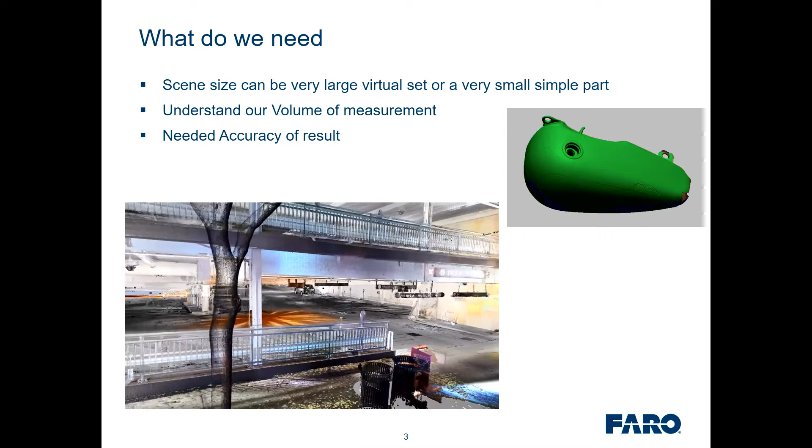So what do we need? How big of a scene size are we going to capture? I've got a couple examples here. I've got something very large, a parking garage that has probably 200 scans. We ran 3 scanners for about a 4-hour period of time to generate that. So millions and millions of points, but it's a very large data set.

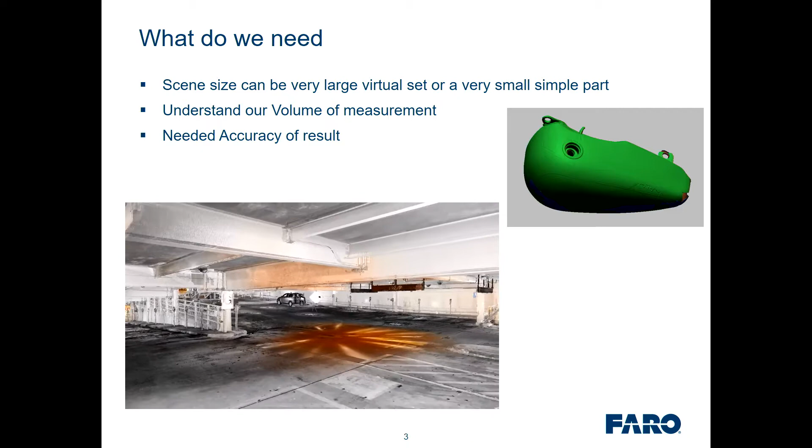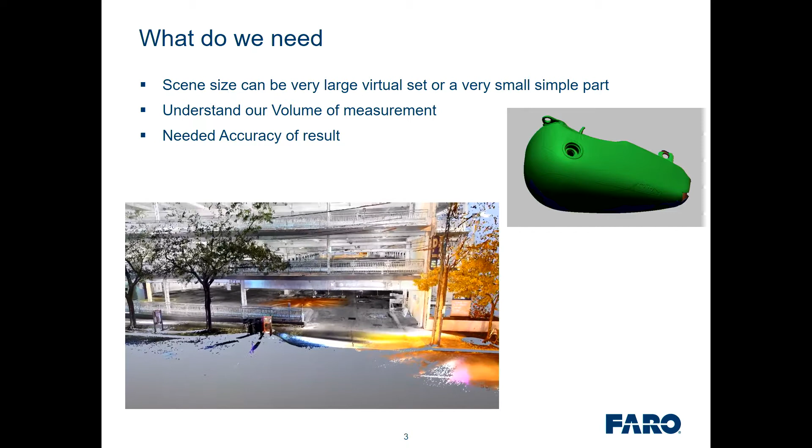And then something smaller, up in the upper right is a gas tank that's been scanned with a smaller device like what I have outside. So we have to understand what our volume of measurement needs are, and we have to understand what kind of accuracies we need from the result.

So method of capture: when I started getting into doing this stuff at Faro, it never occurred to me that there are basically 2 different types of ways to measure. There's contact or non-contact. You're either going to touch something to measure the part, or you're going to use some sort of sensor to measure the part.

Contact measurement is very accurate, but it takes a long time to touch all of these parts. Going back to our garage example, a surveyor would go out with a total station and a rod, and it would take them hours and hours to complete that task. But it'd be very accurate. It also means we have to have access to all the things we're trying to touch.

So think of something maybe like a cylinder head. There might be areas in there that you have to be able to get in and touch, and so it gets challenging at times. Non-contact can help solve some of those problems. It's faster, but not necessarily as accurate as touch probing. We're basically measuring surfaces instead of discrete points, and also we have to maintain a field of view or a line of sight, similar to what we're talking about with contact capture.

Kind of going along those lines, we have different ways to capture using non-contact. Photogrammetry, that's very popular these days. And think about what we're doing with photogrammetry. It's basically we're measuring light. As we open up our shutter, light's reflecting off a surface and coming to it.

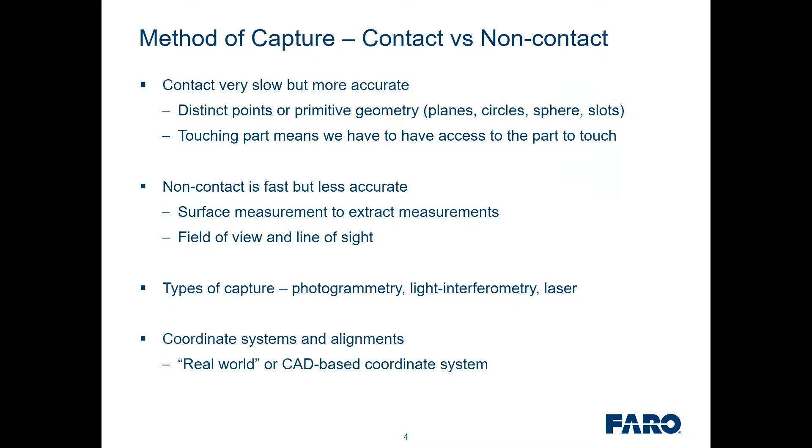So in the world of Faro, we have various products, and this is just a sampling of them, and I've got another product that we're going to talk about at the end. How do we measure our parts? We can go different volumes on the left side, from small volume to large volume, and then accuracies from left to right. So the tracker is a large volume, very accurate laser tracking device,

and we can get into something similar with a contact arm, a measuring arm that has a scanner on the bottom, and then our blue light interferometer, the Cobalt, is shown there. And then that garage I did was with our new Focus product. So that gives you kind of an idea of what types of products can be used to measure these parts.

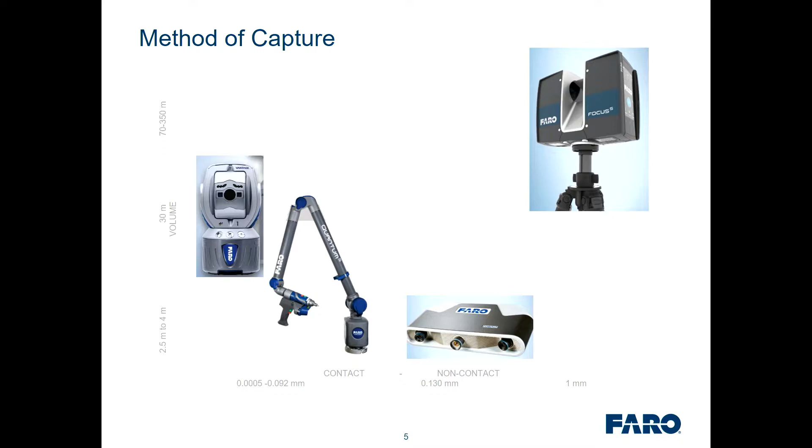So, we collect this data. What do we do with it? Well, we have point cloud data that we have to turn into mesh, because really point clouds are just collected data. In terms of geometry, they're only locations. They can have attributes, like in the focus scanner example, it's XYZs, and then there's an RGB value that's associated with it, or maybe a reflectance value.

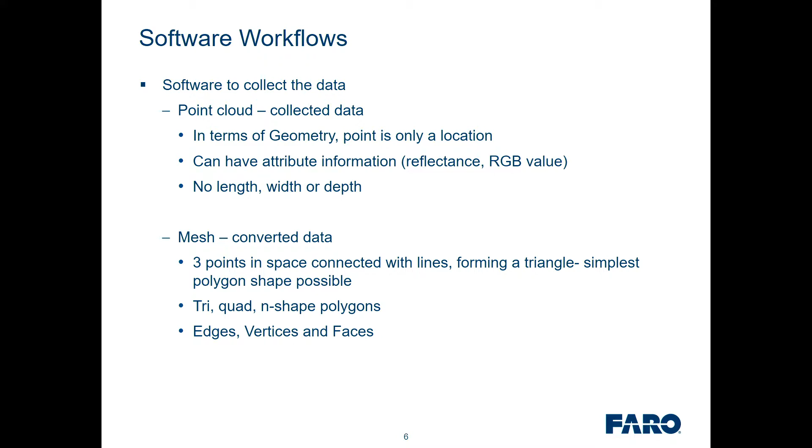There's really no geometry in terms of length or width. We can measure between points, but we can't really get any data off of those points. We can convert it to mesh, so we're just going to convert our point data, and a mesh is just 3 points in space connected with some type of a line, and there's edges, vertices, and faces that are associated with a mesh.

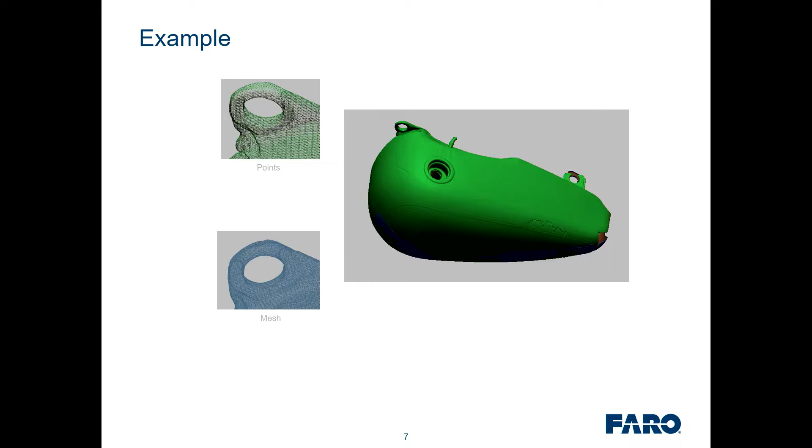So for example, using my gas tank, if you look at the top left, that's points, and then down at the bottom left is mesh. So we've got the points that actually came from the actual device, and then we've converted that data. So it looks very much representative of what we captured in the real world.

So kind of wrapping this part of it up, software workflow. We collect the data, either scanning or probing it, convert it to mesh. We can extract it to parametric type CAD using systems like 3D Systems DesignX. And then we can also visualize our scenes for asset creation using the example of our parking garage, if you're doing something like gaming or VFX.

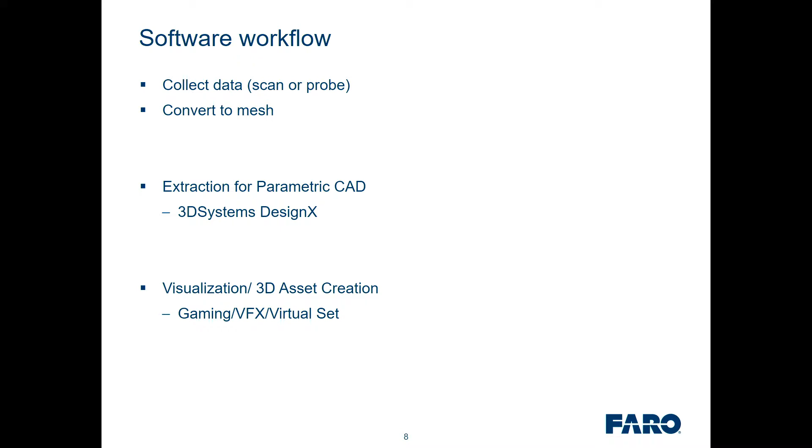So these are kind of our workflows we're going to go through, and I have an example of maybe how we do a product design. So maybe we have a Toyota FJ that we want to put a new bumper on. So we've got our device, remember the arm? We can actually probe and scan points. So this is an example of how we've created a point cloud of scanning.

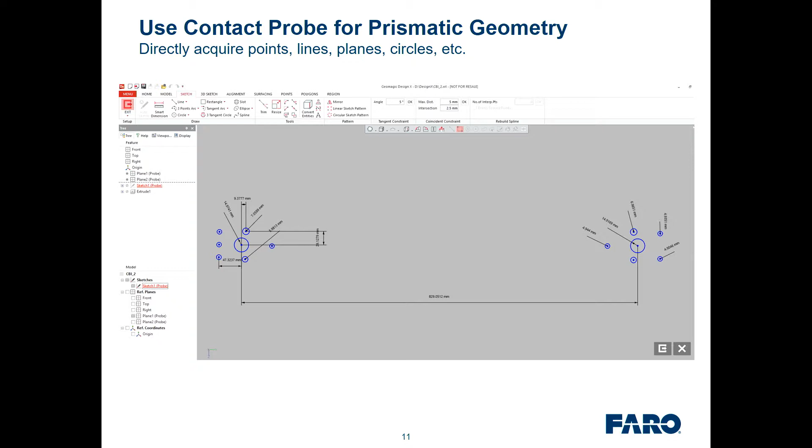And we've probed maybe attachment points, bolt hole locations, something we need very accurate locations on, so we can take that data as well. And then we can align it to a coordinate system. In this case, we're doing a CAD-based coordinate system with a simple 3-2-1 alignment. And then we can define sketch planes and extract data off of the mesh.

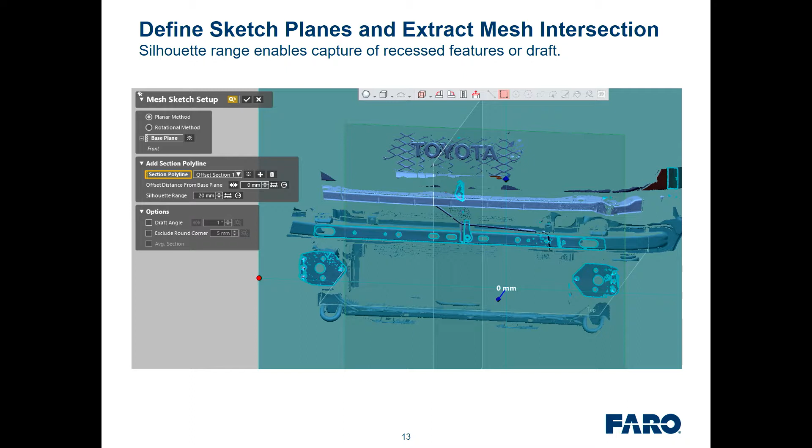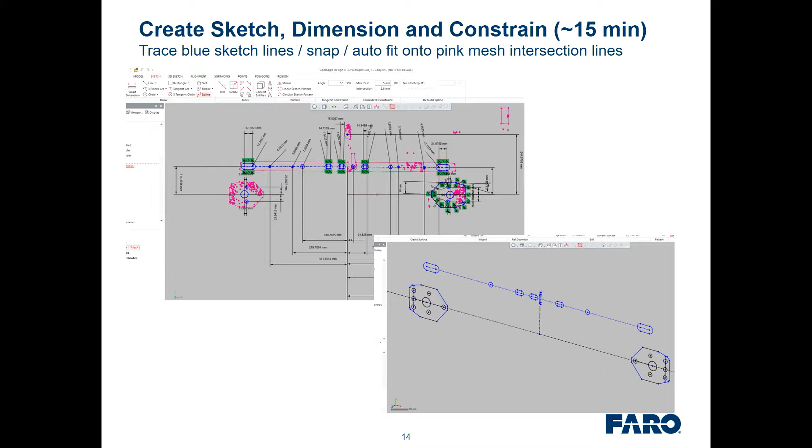So we're just going to create this geometry, and then do extrudes, do lofts, do any number of operations to get it into a CAD model. So basically we're just tracing over. We're just creating lines out of the mesh data, tracing over top of it, and then we can take those and actually create parts.

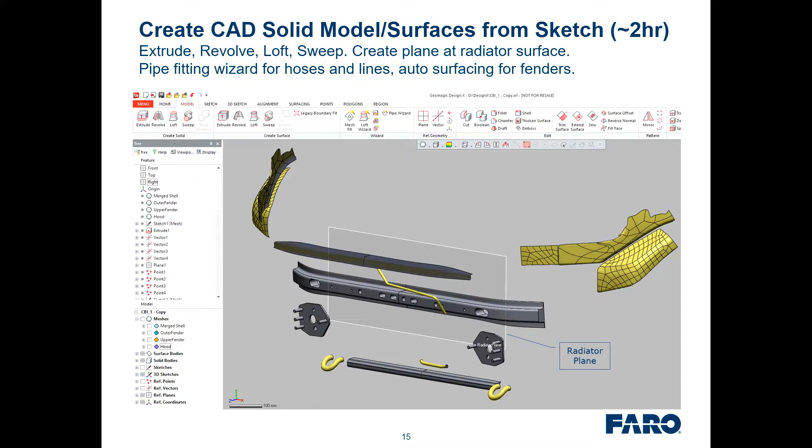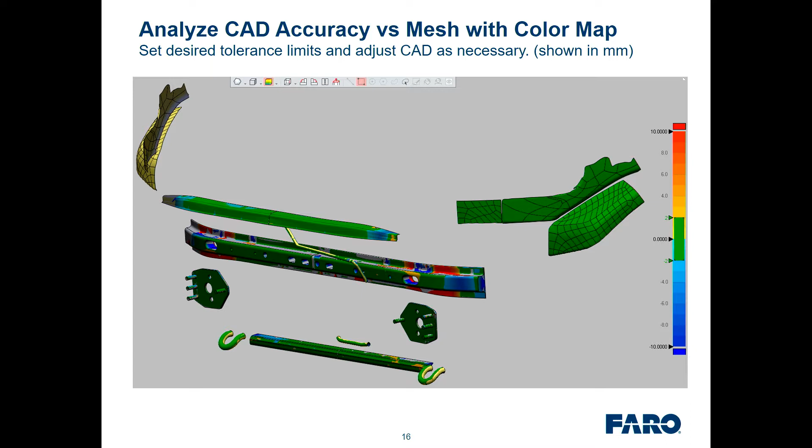So this is an example. We can do solids or surfaces, really any type of data you're looking for. You see we can define things like radiator planes. Okay, so it's very CAD-based. And then we can also analyze. Since now we have a CAD model that we've created, we can go back to the mesh and do comparative analysis to see, hey, how did that fit? So it's a very handy tool for this reverse engineering product design cycle.

Okay, so when we get into this reality and virtuality, so I've talked a little bit about product design and how we look at it. I found this, and I'm glad I'm the first person, because I really don't feel like I'm in the right audience here. I feel like I'm maybe not as well versed in AR, VR, but I saw this and it really struck me because you've got the real environment and you've got the virtual environment, and we're all somewhere in between there. This continuum is about where we are and what we're trying to do.

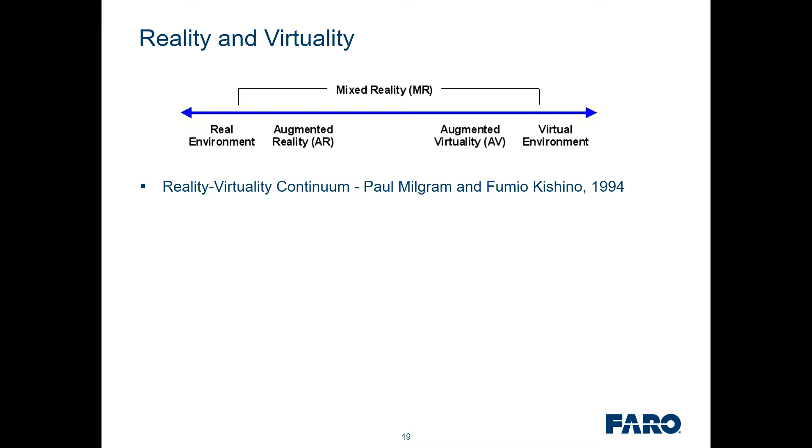And hopefully this product that I have from Faro, well, okay, we're going to talk a little bit about VR AR devices. So you can be totally immersed into the environment, going all the way on the right side of that continuum. It's very hardware intensive. You have to have something on to be able to virtually be in that environment.

Or you can augment by projecting something into your reality. You can also augment your virtuality. So you can go both ways. You can augment your reality, augment your virtuality. But how do we get ourselves into that environment? Well, once again, we're in the Faro world because I'm going to show you Faro's virtual inspector tool.

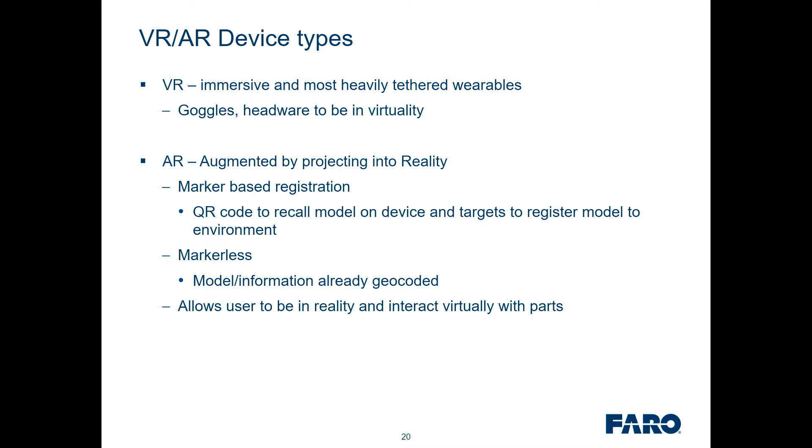So basically, we are going to use QR codes to recall models and have that display on our device. And then, since we've got this device in 3D space and we're not really aligned to anything, how do we get ourselves aligned to our part? Well, we can either do markerless, like if it's geocoded, so when we see it, it automatically is in the right position, or we can use markers to kind of pull ourselves into that alignment.

So kind of going back to the very beginning when we talked about creating parts, we still have to have a coordinate system here. So what we're going to end up with is something that will allow us to be in reality and interact virtually with our parts.

So the Visual Inspect and Visual Inspect AR. So we have two different products. They both run on an iPad. Here we're showing this in an environment on a tripod. And basically you have the QR codes or the digital codes that we see, and when the photo recognizes that, it pulls up the part.

It has a cloud-based attachment to it, so we can pull the part from the cloud, show it up on our iPad, and be registered into that environment. So it can provide us with 3D data that we can visualize and highlight in our manufacturing insights.

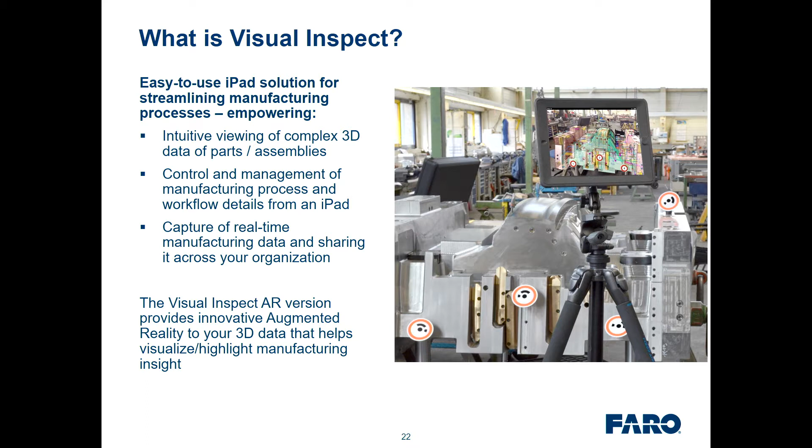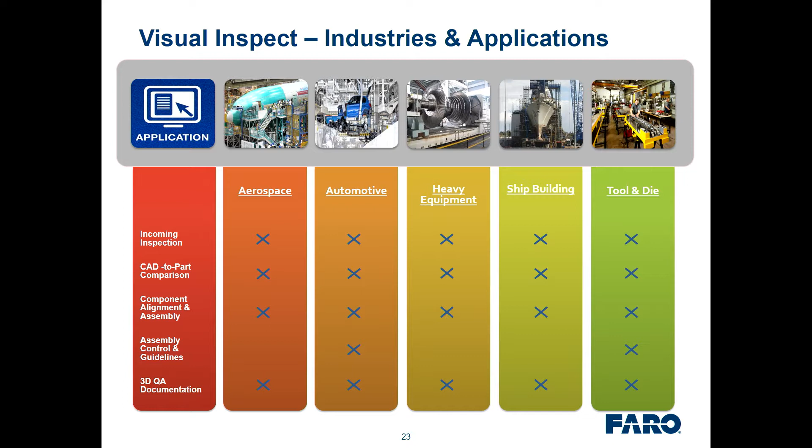So looking at our typical industries and applications, we're very heavy in the automotive and aerospace. I had somebody ask us if we're into the BIM sim world yet with architectural, and I'm sure it'll be there soon. It's just taking another CAD part and showing it into a reality.

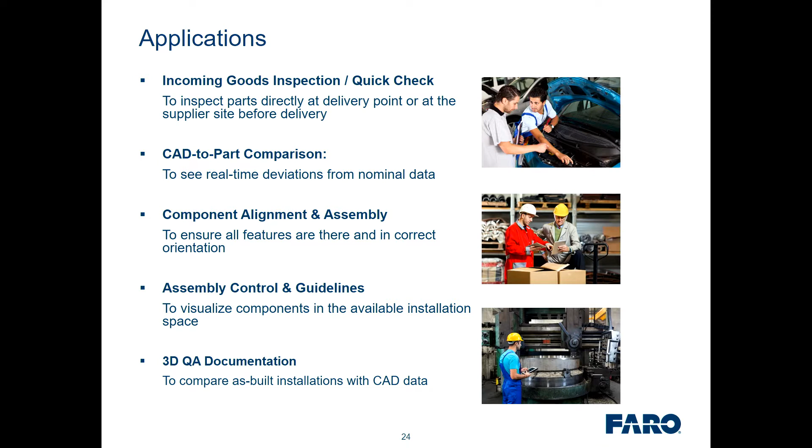So you can see some of the different applications for this. If we have incoming goods, we want to do a quick check. If we're doing assembly, I was actually at GM and they showed me how they're using it with a wiring harness as it gets installed in the chassis. The operator can simply take their iPad, point it at it, pick up a couple of codes, and visually walk with the iPad and look around to see if everything's laying in the right position. Assembly control and guidelines, 3D, quality assurance documentation, all of these things can be used with it.

So the benefits: it's very mobile, it's very inexpensive, it runs on the iPad, so people pretty much have iPads, and we can save time and money by making it easy to use. You see here reducing scrap and rework, capturing, sharing, and real-time data quickly.

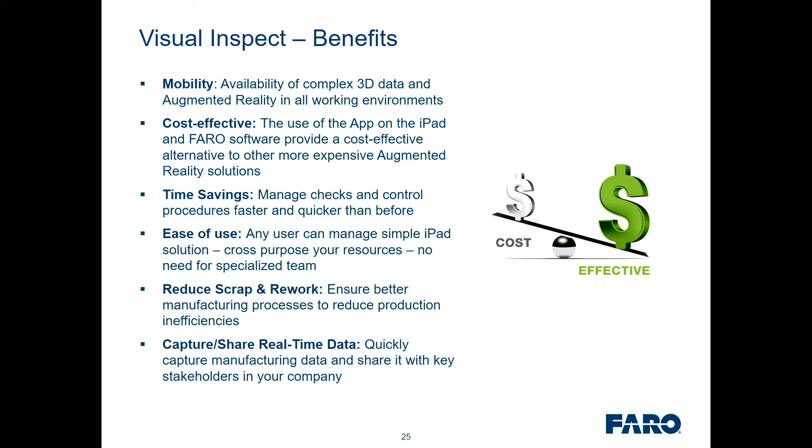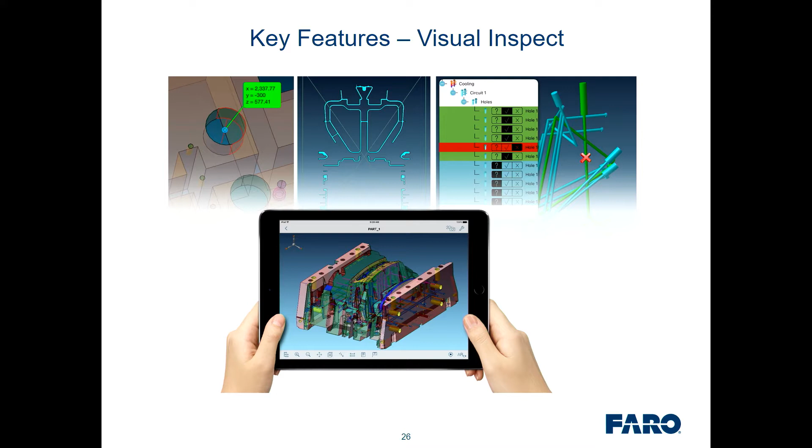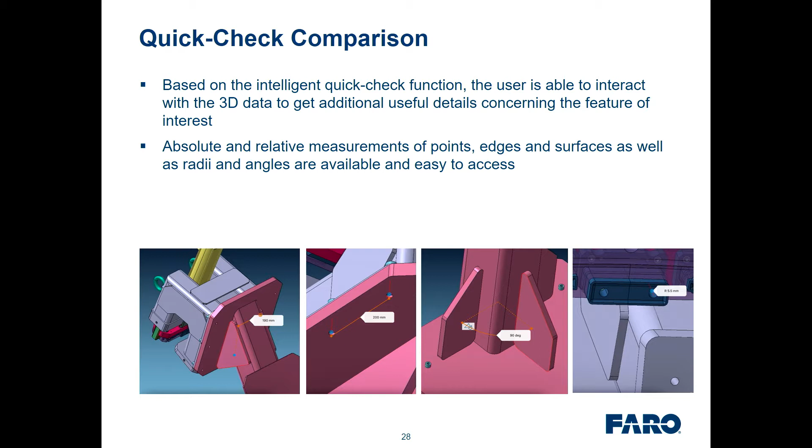So this is an example showing what you would see on the iPad. It has touch functionality, so we can zoom in. We can actually take measurements on our parts as we see them. We can do quick comparisons, see if things look like they're lined up the way they're supposed to be. We can create cross-sections. As we look at it, we can actually see a cross-section in the field as we're standing there holding the device.

And then we can add documentation. So say we're doing an inspection application, and we see something maybe is not the way it's supposed to be. We can actually make a few notes inside of this and then export it out to an Excel spreadsheet.

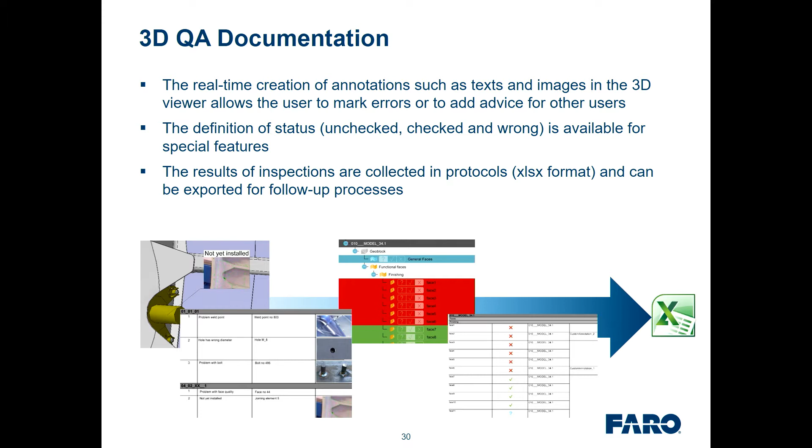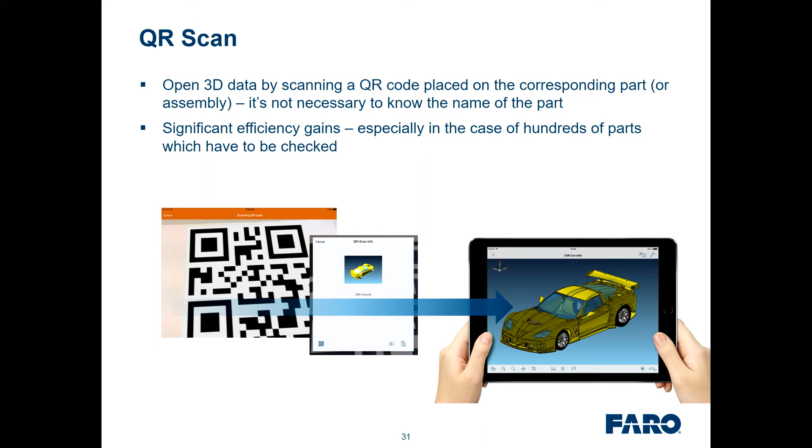So the QR scan code, that's kind of the start of it. We just look at the QR code, take a picture, and then it pulls open the model for us. So now we have the AR version of this. Now we're going to augment our reality by projecting something into it.

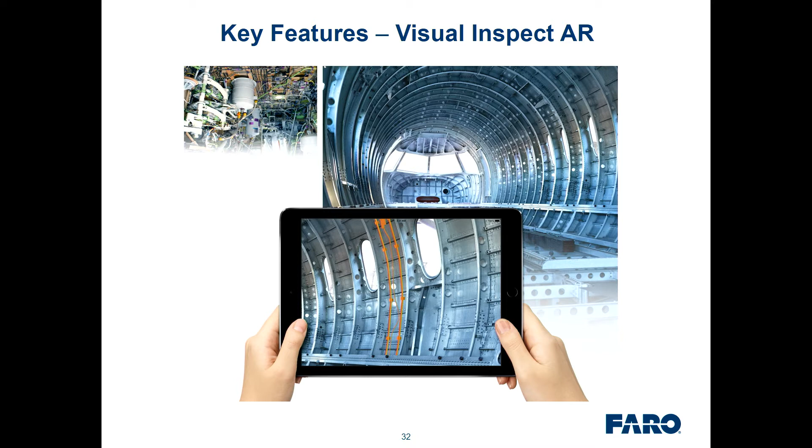So in this case, you're seeing a fuselage of an aircraft where we can project maybe a wiring harness or some type of assembly that's supposed to be there, and we can visually see if it's in the right place. So once again, it's the same tool, it just has an extended use to it. We can see maybe if we're supposed to have some safety railing installed in an environment on the right, or on the left model, just to visually see if we're in the right place.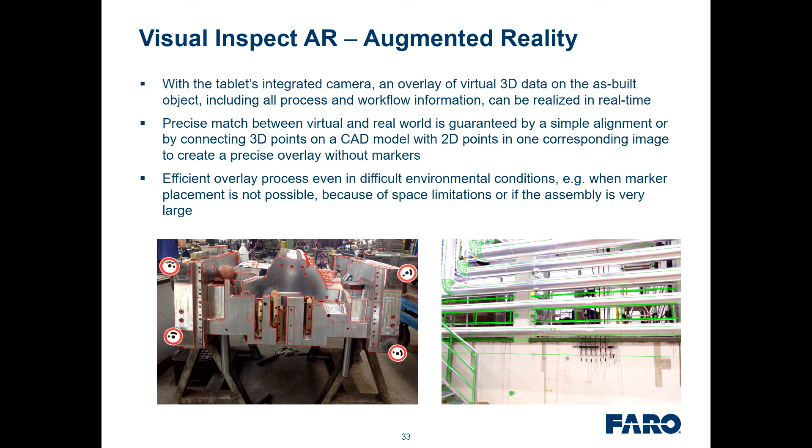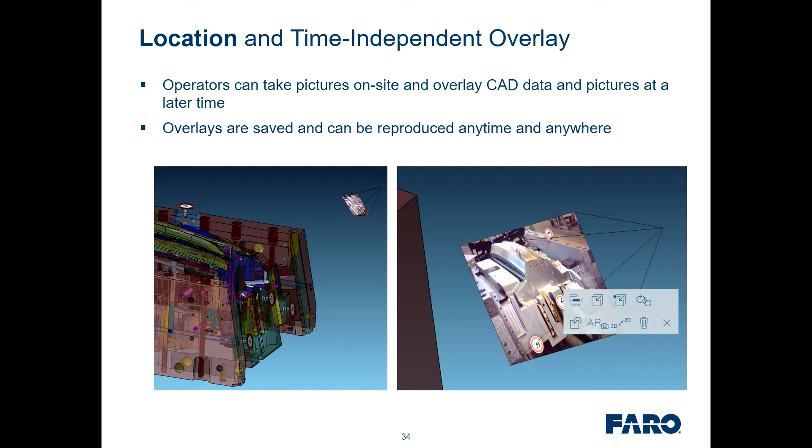Location independent overlay. We can take pictures on site, overlay our CAD data, take pictures at another time, so we can actually document as we're moving along through our process.

So how does this work? We take inputs from different CAD models. You see STL, IGES, CATIA, any of them. We compress them and create our own format, MWPAK. So it's very lightweight. It can be sent through the cloud very easily, and we can get it down to our device. There's so much information on here.

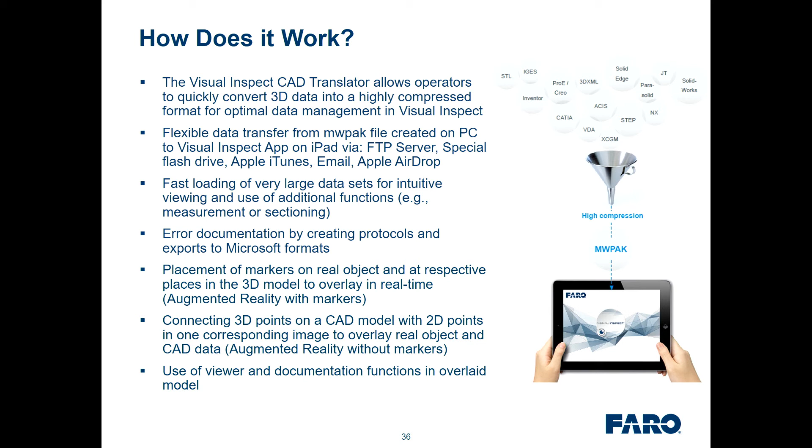So we have a quick case study, and then I'm going to ask if you have questions on our products here. This is an example of a European luxury vehicle and engine manufacturing company. Take three guesses. They have a very highly competitive marketplace, and they have very high standards.

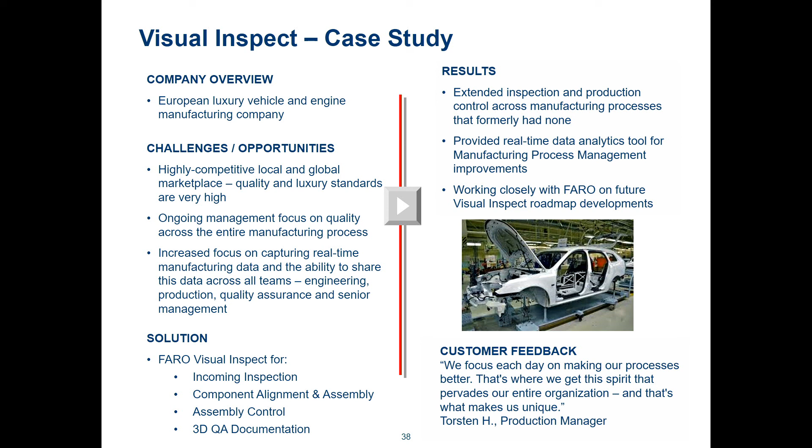So they can take their QA process all across their manufacturing process. They can take this tool with them anywhere in their environment, pull open the CAD model, and visually inspect anywhere along the way.